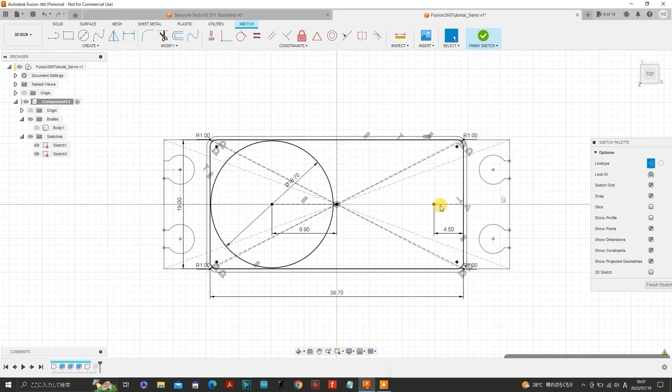Alright, so let's carry on with the design. Select Line from Create again, turn on construction on the sketch palette and select the endpoint of the construction line we have just drawn in. Left click the mouse and extend the line vertically, leaving your finger off the mouse button, and enter 17.8 divided by 2 and hit return.

Next we want to mirror that construction line by selecting Mirror from Create, upon which the mirror palette appears at the right side of the page. So we select the vertical construction line we have just drawn as the object. Then we select by the mirror line indicated in the mirror palette and select the horizontal construction line segment here. So we have one object selected and one mirror line selected, and we press OK. And there we have the mirror vertical line.

Turn off the construction icon, select Line from Create, select the end of the upper vertical line by left clicking the mouse, extend a horizontal line with your finger released from the mouse button, and then left click when you see the blue X mark on the circle, and then you have a fully constrained horizontal line.

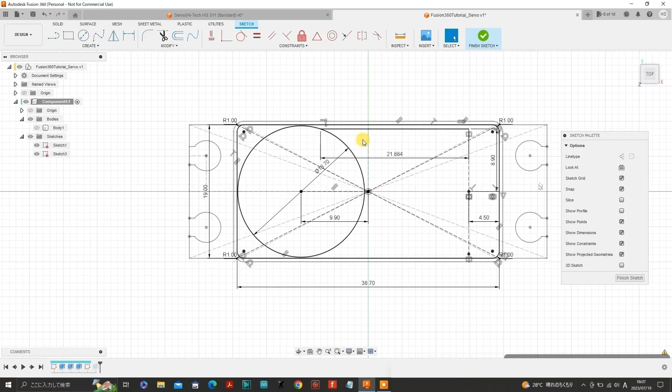Actually, we need to change this vertical line to a solid line by selecting it and then turning off the construction icon on the sketch palette, and also the lower vertical line too. Then we draw in the lower horizontal line in the same manner as we did above. As you can see, this sketch is fully constrained as indicated by the little padlock icon.

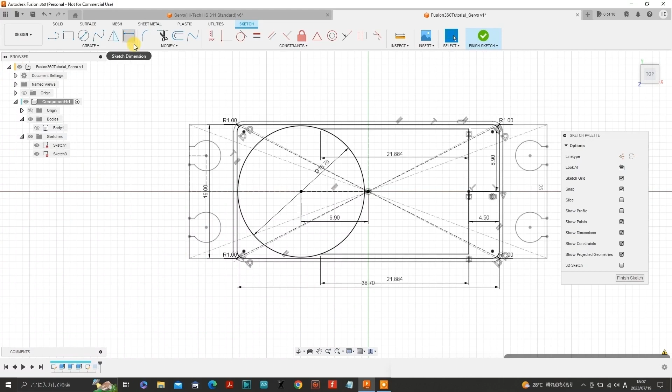I'll just move the dimensions further out. Next we'll round the upper and lower corners here. Select Fillet from Modify, select the upper line and then the vertical line on the right, and set the radius to 0.5 by entering 0.5 on the keyboard, and do the same for the lower corner. I'll just move the radius dimensions outside the servo body for visibility.

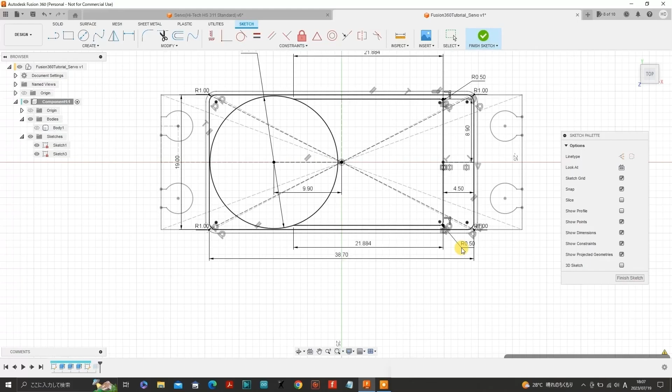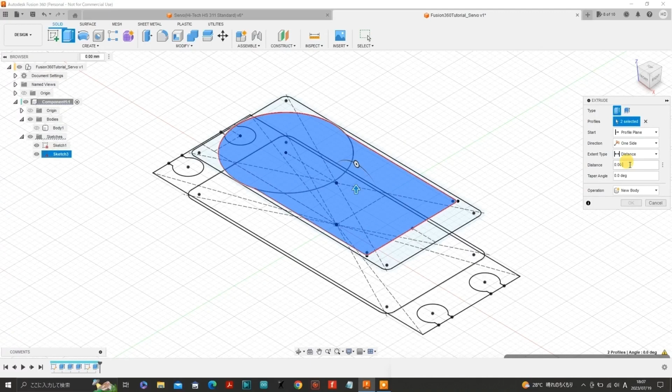Okay, check Show Profile on the sketch palette and press Finish Sketch. Select the circle and the remainder of the shape we have just created in the sketch while pressing the Shift key so that both shapes can be selected simultaneously. Select Extrude from Create and the Extrude palette appears on the right side. Input 2.8 for the extruding distance and hit return.

The rest of the extruded body isn't showing, so we'll show the body by selecting the eye icon. Zoom out a bit and move the servo body to the center of the page using the Move tool.

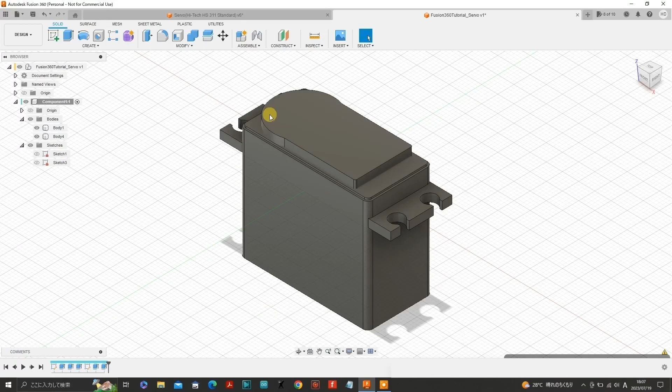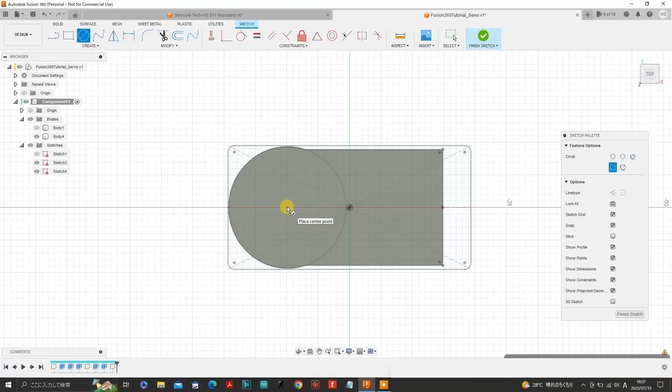So we want to create a new sketch on a plane lying on the top surface here. Select the top face and select New Sketch from Create. I'll just turn off the body underneath and I'll turn on the sketches, or maybe just the previous one for now. Just zoom in, select Circle from Create, go to the center here, left click the mouse, release your finger and move out a bit, enter 13 on the keyboard and hit return.

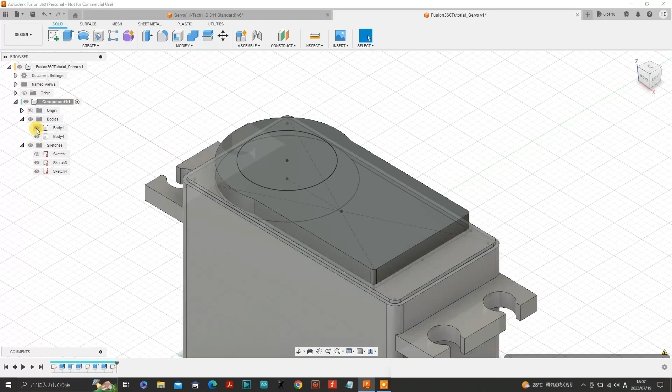Now press Finish Sketch. Just go to Home here and also zoom in a bit, and let's show the rest of the body. Now select Extrude from Create and the Extrude palette appears on the right side of the page. Select the circle we have just created, enter 1.6 for the distance in the Extrude palette and press OK.

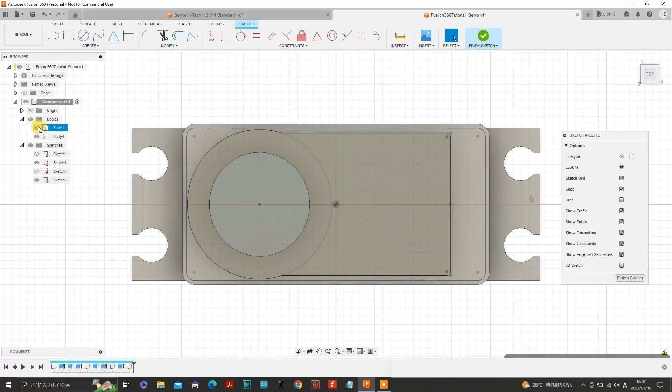Select the top circle and then select New Sketch from Create. I'll just hide the lower body. Select Circle from Create, left click on the center of the circle here, drag with your finger off the mouse button and enter 10 on the keyboard and hit return.

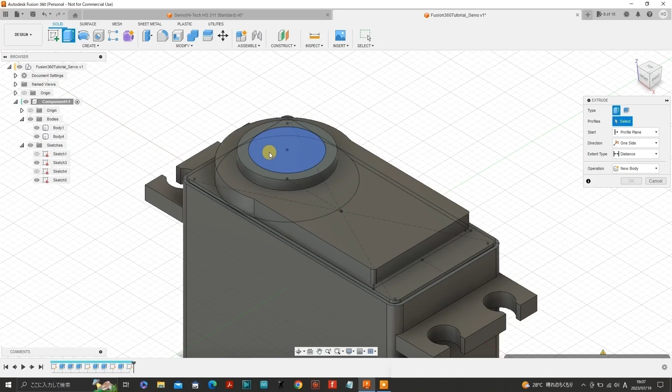Press Finish Sketch. I'll just show you the rest of the body. Select Extrude from Create and the Extrude palette appears. Select the circle we have just created and set the extrusion to a distance of 1. I'll just zoom out a bit and move the servo to the center of the page.

Now let's select the select icon and select the entire servo body. Select Fillet from Modify, upon which the fillet palette appears on the right.

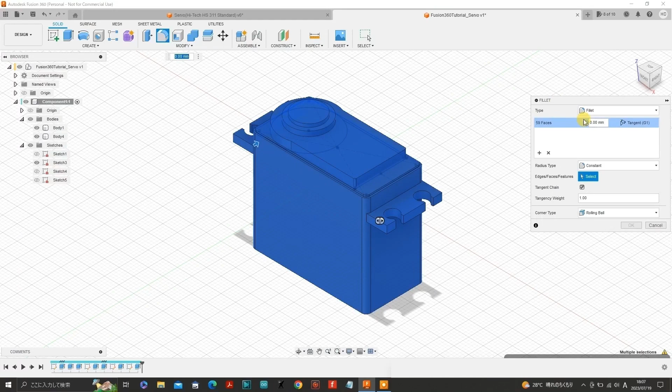Enter 0.2 and hit return. Now the servo body no longer has any sharp edges but has been rounded off at a radius of 0.2 millimeters. So it's looking good. That's more or less the servo body completed. You can go into more details if you want to.

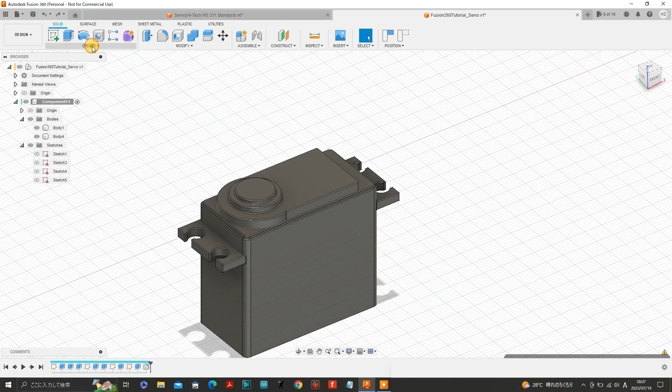Now it's time to create a servo horn. Go to Create and select New Component and press OK. Select the circular top of the somewhat invisible servo body and then select New Sketch. This dialog box appears and you want to select Capture Position.

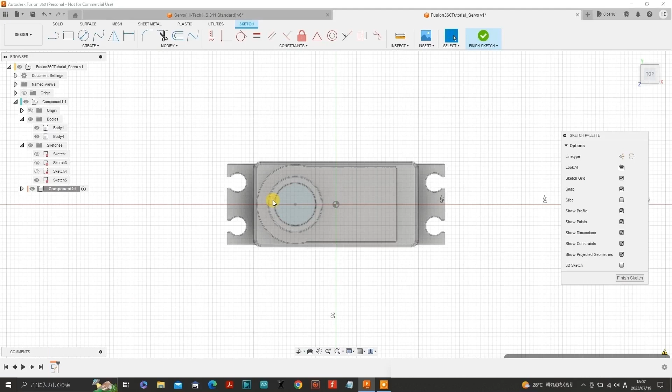Our servo horn is the round type, so we'll need to select Circle from Create. I'll just open up the component folder here to see the sketch file. Left click the mouse at the center, drag with your finger released, type in 24 and hit return.

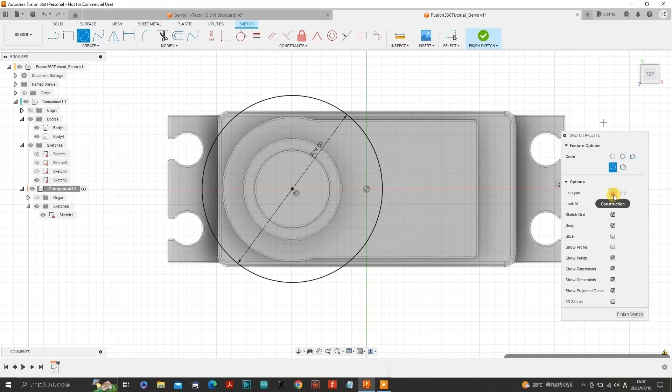Select Circle from Create. This time we want a construction circle, so we'll select Construction on the sketch palette. Just zoom in a bit and left click the mouse at the center, drag with your finger released. This time type in 17 and hit return.

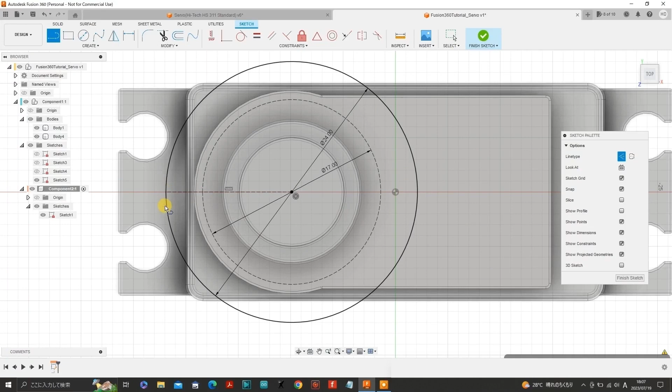With construction still activated, select Line from Create, left click the mouse at the center, release and extend horizontally until you reach the outer circle and left click the mouse again. You should have a fully constrained horizontal construction line.

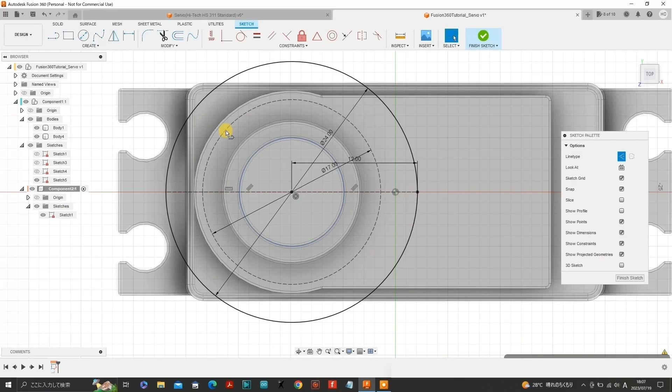Make sure the sketch file still shows the padlock icon. If it shows an editing pencil icon, then for some reason your line is not fully constrained and you'll need to press undo and try again. Do the same again, only this time from the center to the right side of the outer circle. Here I have hidden the servo body so we can see better.

Select Line from Create, left click at the center of the circle, drag a construction line at an acute angle deliberately past the outer circle, press Tab to activate the input of the angle, enter 18, which means 18 degrees, and hit return. Still not fully constrained, but that's okay.

As you can see, we have two construction line segments lying outside the outer circle now, one at 18 degrees and the other extending horizontally. So let's choose Coincident from Constraints, then select the end of the angled line segment and then the outer circle, and then this line is constrained to the outer circle. Do the same to the horizontal line, and now we can see that the sketch is fully constrained.

There we have a fully constrained construction line that extends at an angle of 18 degrees, which is 1/20th of the complete 360 degree angular distance about the origin.

Let's mirror this angled construction line by selecting Mirror from Create, and the mirror palette shows up at the right side of the page. The object we select is the construction line angled at 18 degrees. As you can see in the mirror palette, next to Objects is one selected. Now left click on Select for the mirror line, go over to the horizontal construction line and select it. Then go back to the mirror palette and press OK.

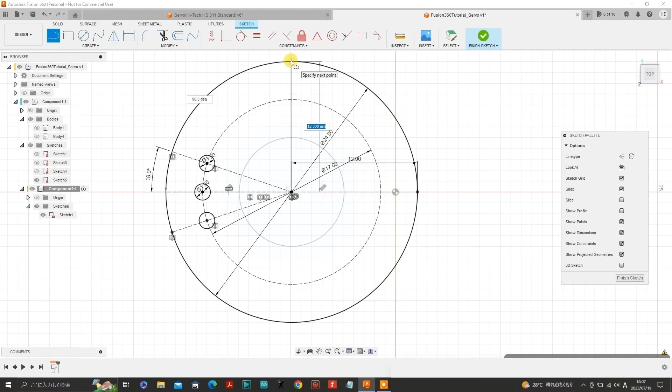Left click at the origin and then at the outer circle. The sketch is still fully constrained, so that worked fine. I'll just change the vertical line into a construction line.

We want another 3 circles on the right side as well, so we select Mirror from Create and the mirror palette shows up on the right side of the page. We select each little circle. Now the mirror palette indicates that there are 3 objects selected, that is the 3 circles.

Press Select next to Mirror Line in the mirror palette. Select the vertical construction line here and press OK. There we have 3 new circles in perfect symmetry with the other 3 circles.

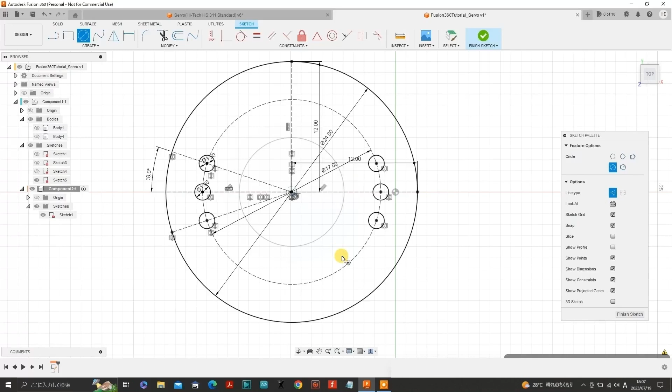Now we need to draw in a few construction circles, so select Circle from Create. We're in construction mode. Just go directly to the origin, left click, drag radially outward with your finger off the mouse button, type in 14 and hit return.

Then do the same again, only this time enter 20 and hit return. I'll just move the dimensions out of the way.

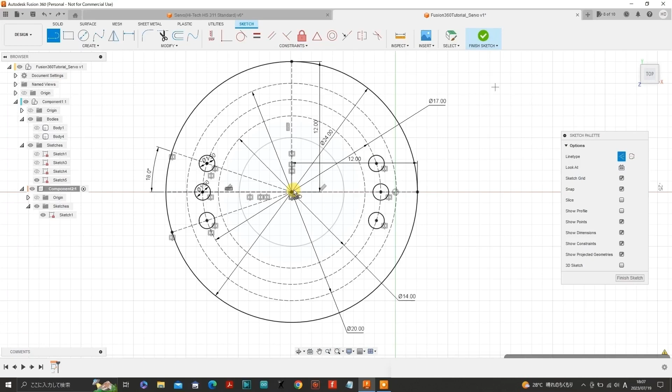We should also make a vertical construction line downward from the origin, so select Line from Create. Left click at the origin, release and extend vertically downwards, and just left click at the outer circle and we have another fully constrained vertical construction line.

Select Line from Create, left click from the origin, extend upward toward the right slightly and left click at the outer circle. Note at the moment the sketch is not constrained. As you can see, this line can be moved about the center, rotated about the center, so that's what it's like when it's not constrained.

Next, select Perpendicular from Constraints. Select the construction line that extends leftward at 18 degrees, then select our newly drawn construction line. Instantly our new construction line extends perpendicular to our 18 degree line, making it extend at 90 plus 18 degrees, or 108 degrees. As you can see, our sketch is now fully constrained.

Next, select Circle from Create, turn off the construction icon on the sketch palette, left click at the intersection between our new construction radial line and the outer construction circle. Extend outwards with your finger off the mouse button, enter 1.5 and hit return.

Select Mirror from Create, left click on the little circle we just made, and as you can see in the mirror palette at the right of the page, one object, the little circle, has been selected. Now we hit Select for the mirror line and then choose the mirror line, which is the vertical construction line that goes through the center of the circle. Then hit OK on the mirror palette to get an exact copy on the left side of our little circle.

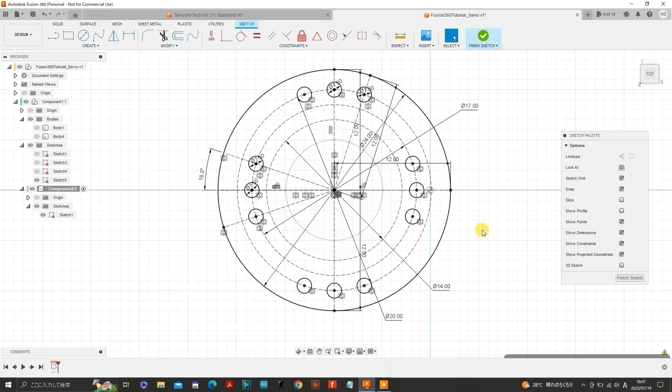Now we need to draw similar circles, except they will lie on the construction circle having the smallest diameter. I will use the exact same method, so I will just speed up the camera and we'll just carry on.

Okay, now let's hit Finish Sketch and select Home. I'll just zoom out using the mouse wheel with the cursor at the center. As you can see, the finished sketch is fully constrained.

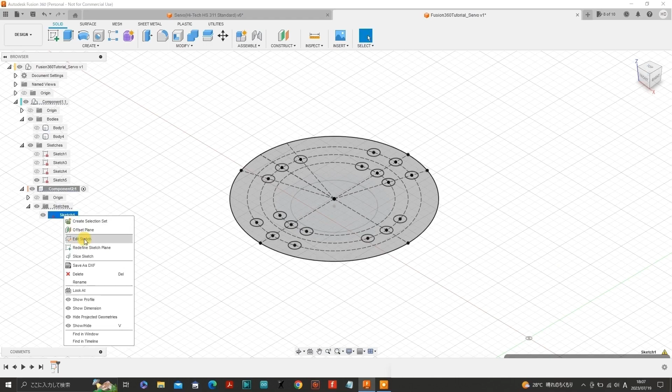Actually, we'll right click on the sketch file and edit sketch to get to the sketch because I didn't have show profile checked on the sketch palette, so I'll just do that now and press the finish sketch button again.

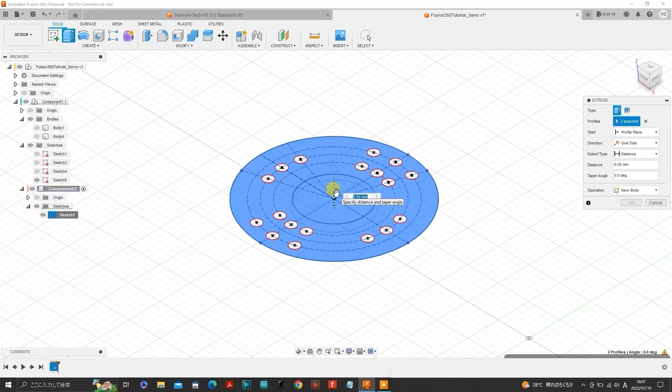Now we'll select extrude from create so that the extrude palette shows up at the right side of the page. Select the profile you want to extrude, which is the entire contents of the circle minus all the holes. Enter a thickness of 2 and hit return.